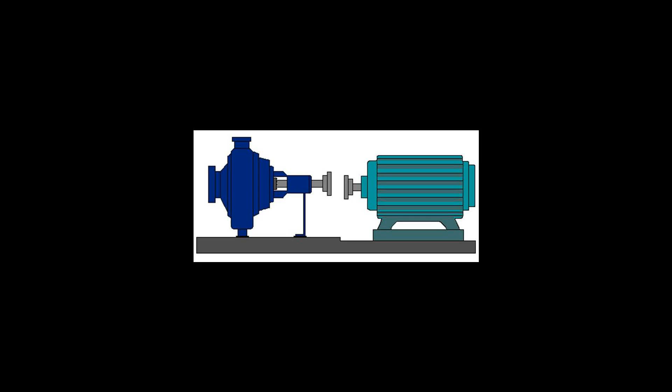Machining vibrations, also called chatter, correspond to the relative movement between the workpiece and the cutting tool. The vibrations result in waves on the machined surface.

This affects typical machining processes, such as turning, milling and drilling, and atypical machining processes, such as grinding. A chatter mark is an irregular surface flaw left by a wheel that is out of true in grinding, or a regular mark left when turning a long piece on a lathe, due to machining vibrations.

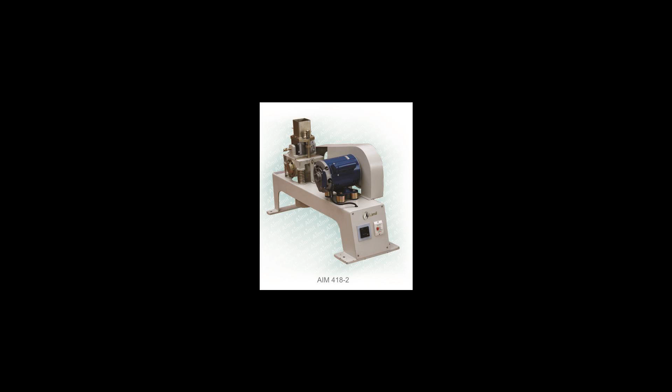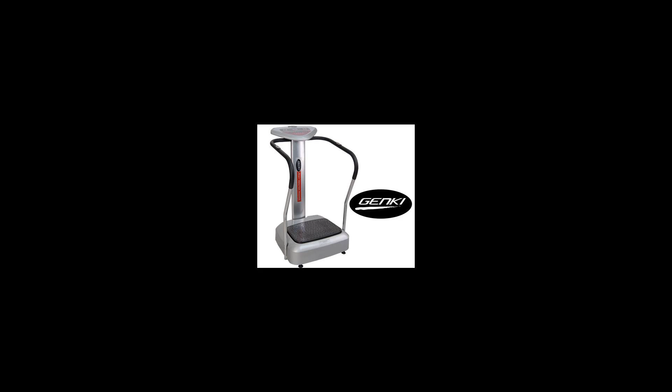As early as 1907, Frederick W. Taylor described machining vibrations as the most obscure and delicate of all the problems facing the machinist, an observation still true today. As shown in many publications on machining, mathematical models make it possible to simulate machining vibration quite accurately.

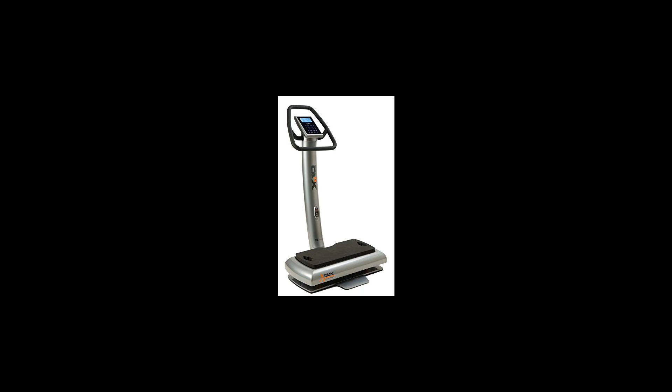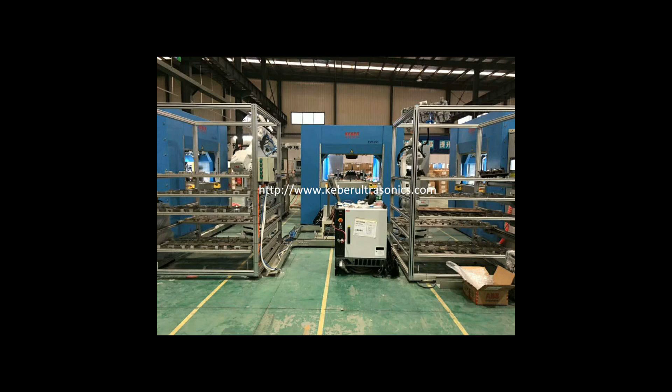But in practice it is always difficult to avoid vibrations, and there are basic rules for the machinist: rigidify the workpiece, the tool and the machine as much as possible; choose the tool that will excite vibrations as little as possible, by modifying angles, dimensions, surface treatment, etc.

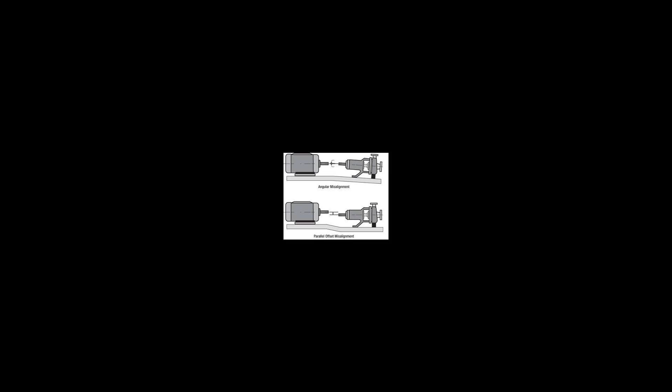Choose exciting frequencies that best limit the vibrations of the machining system, such as spindle speed, number of teeth and relative positions, etc. Choose tools that incorporate vibration damping technology.

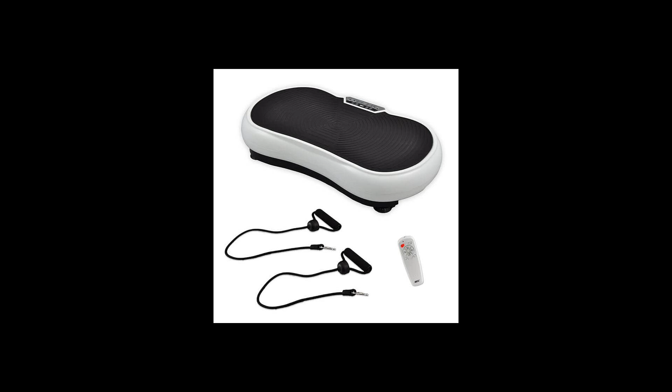Industrial context: link between high-speed machining and vibrations. The use of high-speed machining, HSM, has enabled an increase in productivity and the realization of workpieces that were impossible before, such as thin-walled parts.

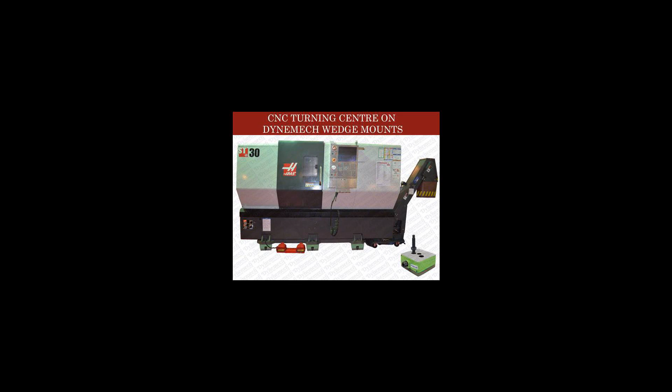Unfortunately, machine centers are less rigid because of the very high dynamic movements. In many applications, i.e. long tools, thin workpieces, the appearance of vibrations is the most limiting factor and compels the machinist to reduce cutting speeds and feeds well below the capacities of machines or tools.

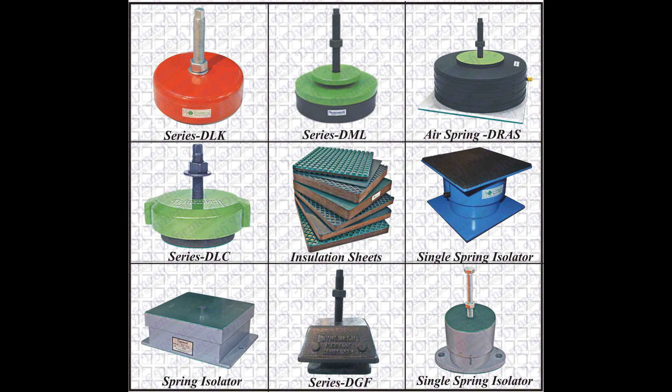Different kinds of problems and their sources. Vibration problems generally result in noise, bad surface quality, and sometimes tool breakage. The main sources are of two types: forced vibrations and self-generated vibrations.

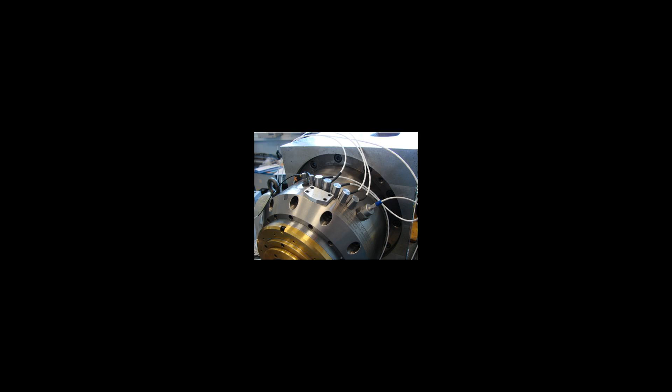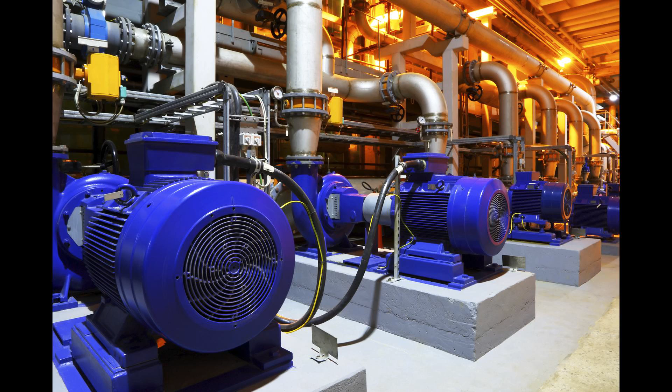Forced vibrations are mainly generated by interrupted cutting, inherent to milling, run-out, or vibrations from outside the machine. Self-generated vibrations are related to the fact that the actual chip thickness depends also on the relative position between tool and workpiece during the previous tooth passage.

Thus, increasing vibrations may appear up to levels which can seriously degrade the machined surface quality.

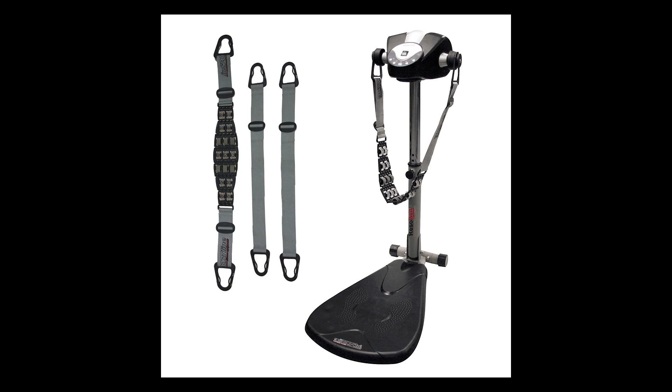Laboratory research: high-speed strategies. Industrial and academic researchers have widely studied machining vibration. Specific strategies have been developed, especially for thin-walled workpieces, by alternating small machining passes in order to avoid static and dynamic flexion of the walls.

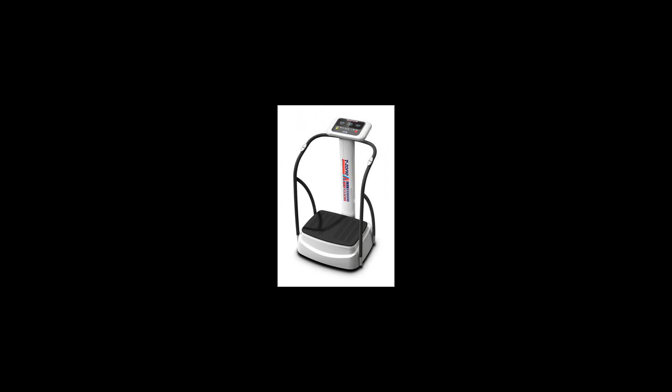The length of the cutting edge in contact with the workpiece is also often reduced in order to limit self-generated vibrations. Modeling: the modeling of the cutting forces and vibrations, although not totally accurate, makes it possible to simulate problematic machining and reduce unwanted effects of vibration.

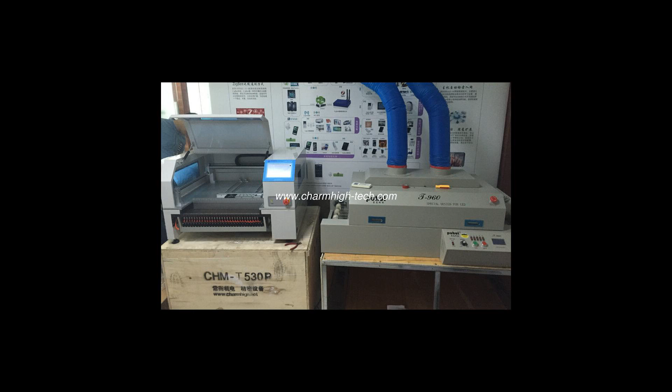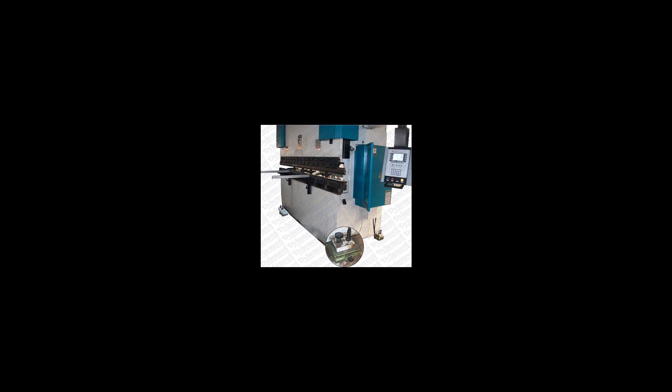Stability lobe theory: multiplication of the models based on stability lobe theory, which makes it possible to find the best spindle speed for machining, gives robust models for any kind of machining.

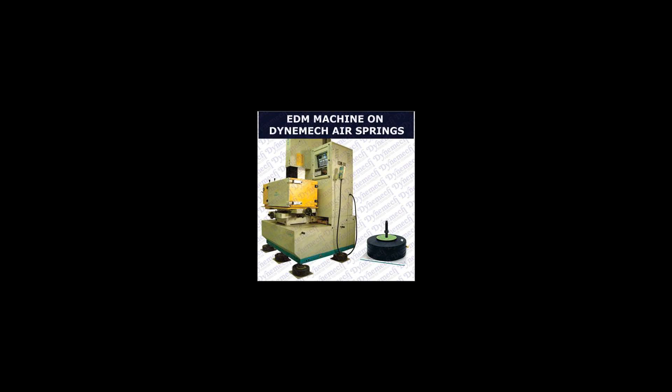Time domain numerical model: time domain simulations compute workpiece and tool position on very small time scales without great sacrifice in accuracy of the instability process and of the surface modeled.

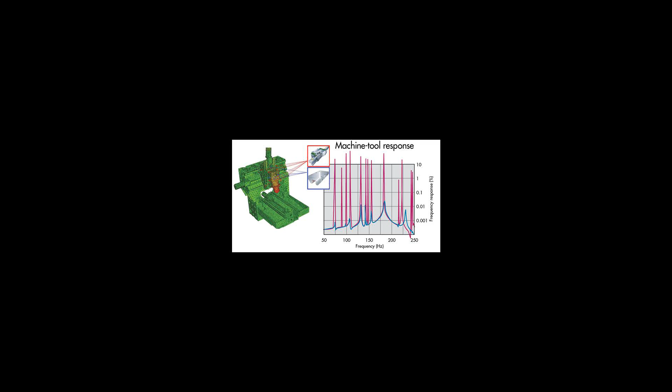These models need more computing resources than stability lobe models, but give greater freedom regarding cutting laws, run-out, plowing, and finite element models.

Time domain simulations are quite difficult to robustify, but a lot of work is being done in this direction in the research laboratories.

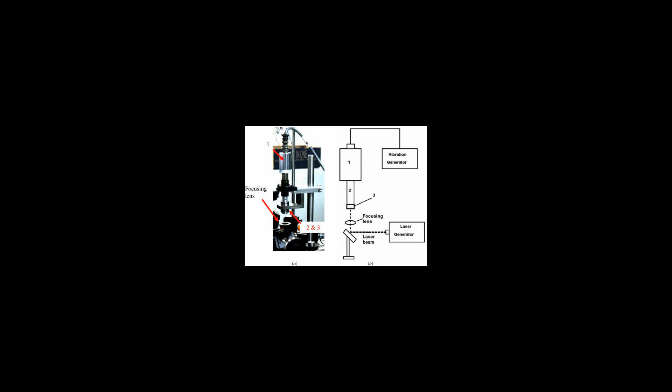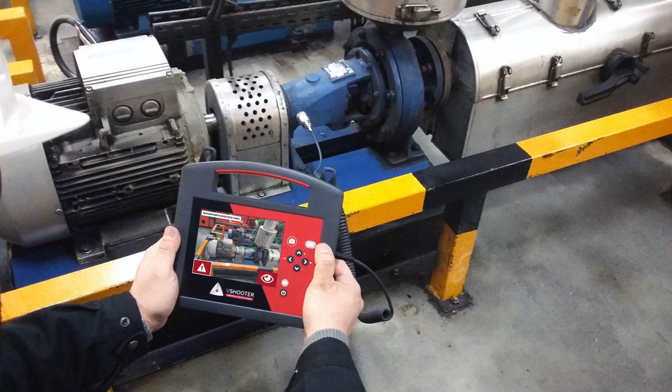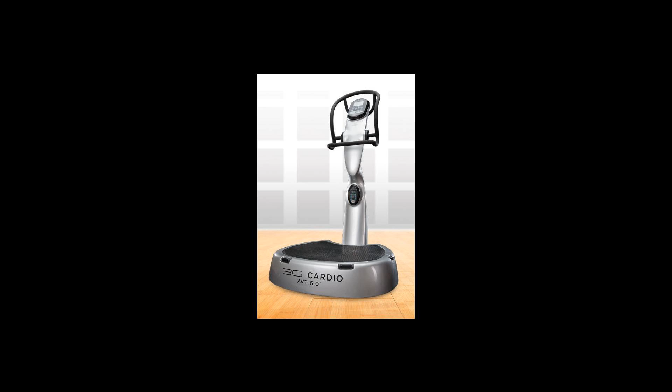Tools. In addition to stability lobe theory, the use of variable tool pitch often gives good results at a relatively low cost. These tools are increasingly proposed by tool manufacturers, although this is not really compatible with a reduction in the number of tools used.

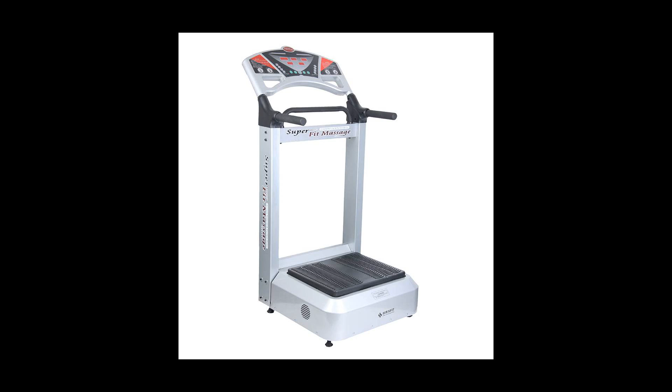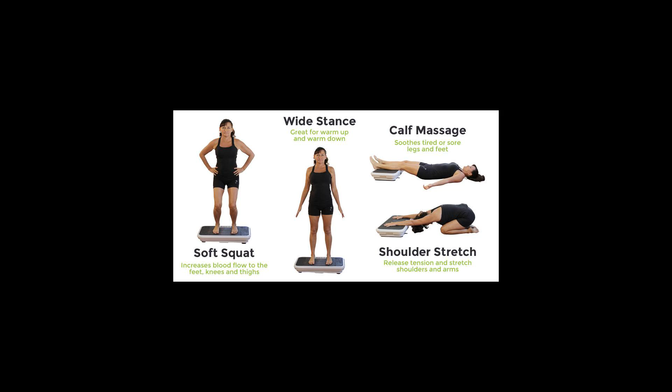Other research leads are also promising, but often need major modifications to be practical in machining centers. Two kinds of software are very promising: time domain simulations, which give not yet reliable prediction but should progress, and vibration machining expert software, pragmatically based on knowledge and rules.

Industrial methods used to limit machining vibrations. The classic approach, the usual method for setting up a machining process, is still mainly based on historical technical know-how and on trial and error to determine the best parameters according to the particular skills of a company. Various parameters are studied in priority, such as depth of cut, toolpath, workpiece setup, and geometrical definition of the tool.

When a vibration problem occurs, information is usually sought from the tool manufacturer or the CAM, computer-aided manufacturing software retailer, and they may give a better strategy for machining the workpiece.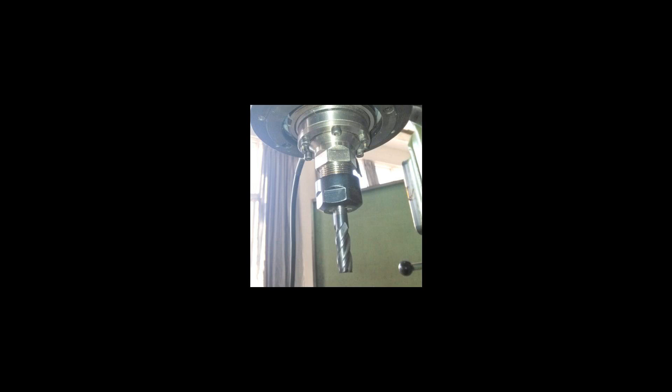Sometimes, when vibration problems are too much of a financial prejudice, experts can be called upon to prescribe, after measurement and calculation, spindle speeds or tool modifications.

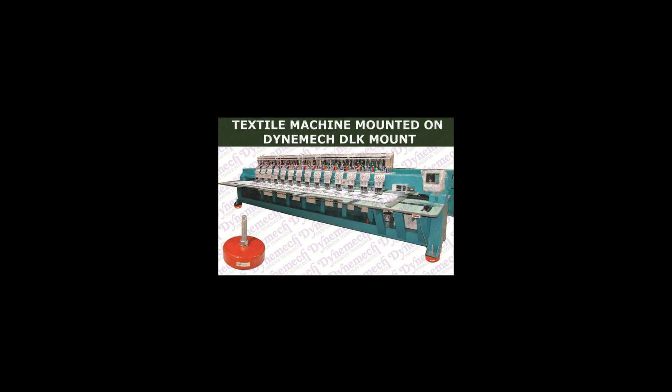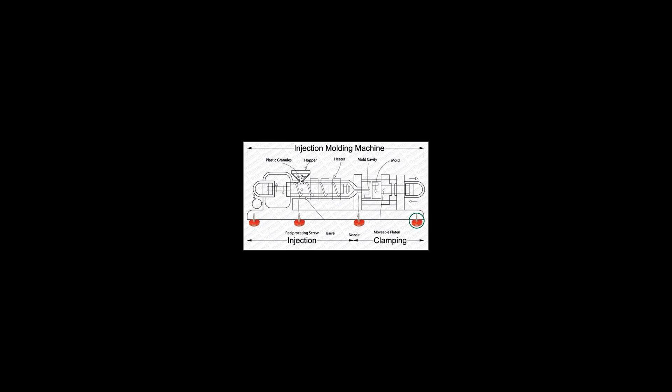Limitations of the available methods compared to the industrial stakes. Commercial solutions are rare. To analyze the problems and propose solutions, only a few experts offer their services.

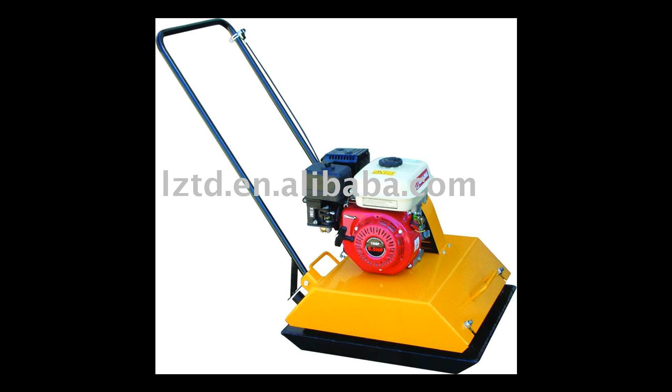Computational software for stability lobes and measurement devices are proposed, but, in spite of widespread publicity, they remain relatively rarely used. Lastly, vibration sensors are often integrated into machining centers, but they are used mainly for wear diagnosis of the tools or the spindle.

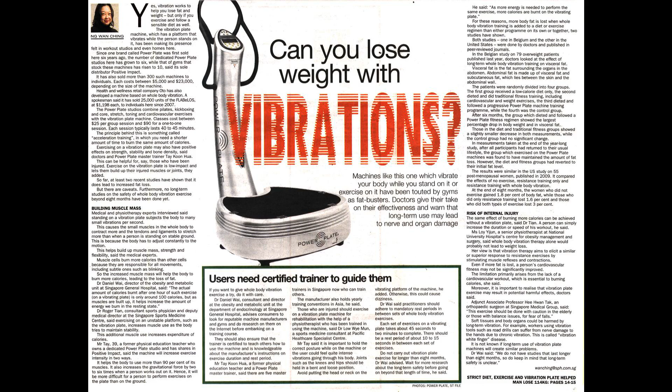New generation tool holders, and especially the hydraulic expansion tool holders, minimize the undesirable effects of vibration to a large extent.

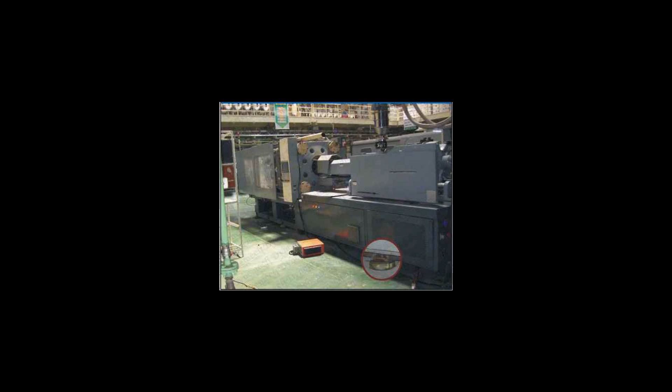First of all, the precise control of total indicator reading to less than 3 micrometers helps reduce vibrations due to unbalanced load on cutting edges, and the little vibration created thereon is absorbed largely by the oil inside the chambers of the hydraulic expansion tool holder.